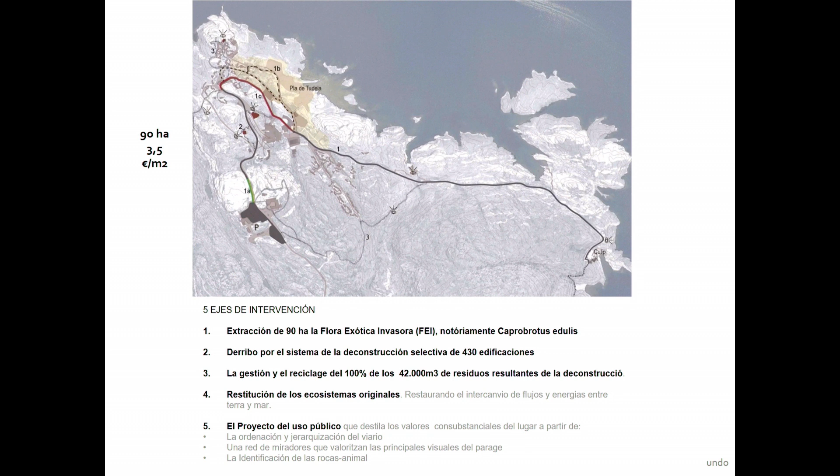The project itself was about deconstructing all these 430 little huts, restaurants, amphitheaters, tennis courts, and everything, to leave some parking space. Although it wasn't in the first mission, we proposed leaving a path so that you could actually visit the site.

Beside that, once you deconstruct something, there are good or bad ways to deal with all the recycled material.

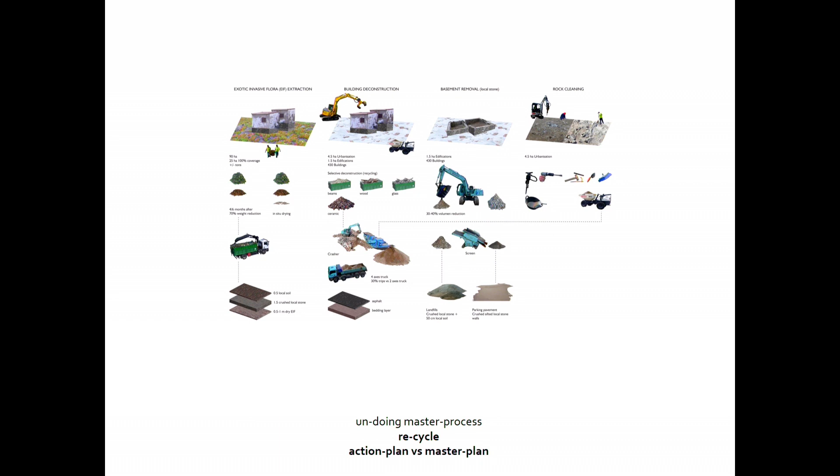So the project had - this is the master plan, and it's a process. It's a process of what we did with the invasive flora that came out of the gardens, the ice plant that was covering the protected rocks.

What we did with the upper part of the buildings, which was built with non-local stone - it was crushed, the wood separated, and the glass and everything recycled. And what we did with the basement, which was built with local stone, and then it followed.

So this project is very much about almost a protocol or procedure to deconstruct and go back to what was there. The project itself was amazing.

It's probably the nicest modern movement or postmodern movement project in Costa Brava, but this was settled all around - well, when this was built, it was the time of dictatorship in Spain. Franco was alive, and then when democracy came, this became a natural park. So it was a spot in the middle of a natural park, and all around was protected.

Then the Club Med model started having problems because it was too austere - rooms with no toilet, and so on - so the whole system was a bit in collapse, and there was a lot of pressure to preserve that space. Finally the state and the Catalan government put money in, and what we did is this.

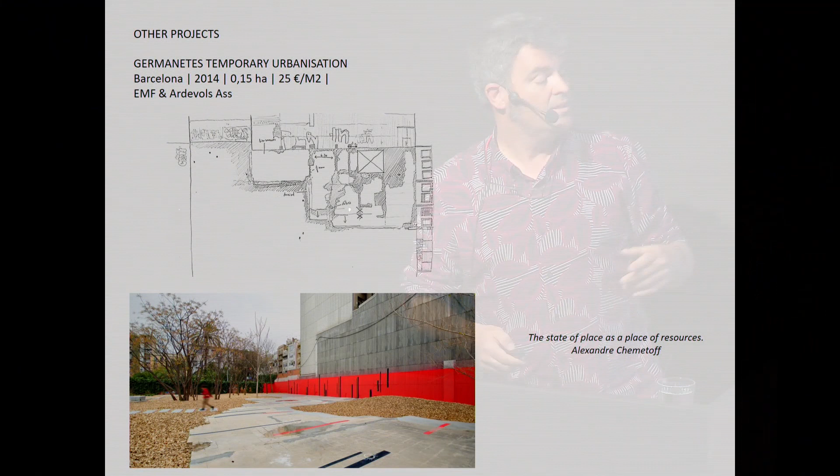This is a completely different project in Barcelona that also has to do with this idea of a bit of deconstruction, and using what is already inside the place. This is a very, very cheap project. It really happened during the top moment of the crisis. And the municipality of Barcelona said, we have these 20 spaces, and took some teams and said, we have no money, just a little money, do something so that temporarily it can be used.

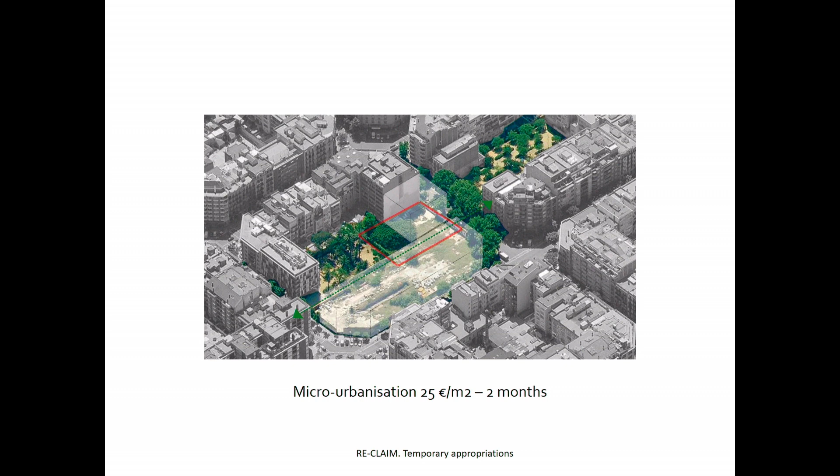So that space was about, that's the surface itself that we're talking about. So when you have no money, what can you do? You really cannot transform the site in depth. What you can do is what judo actually does. You can use the force of the site to make it go farther.

So we did some mapping of the existing quality of the paving and some walls, and then we found out that just beside the site where we were building, the district of Barcelona had a storage place where they had all the pieces they used to build the streetscapes, the curbs and so on. So we did an inventory of it, we named it, we calculated how many they had, and then we used exactly the everyday material of the city of Barcelona, but in a non-conventional way.

So that's kind of a summary where we used those existing windows, we removed the curtains, and then we painted it black. So at the end, when you would be inside and you would see the people walking outside, it would be like they were performing in a theater. Or we used the plastic pieces that separate cars from bicycles. So we played with it all, but in a non-conventional way. These are the granite curbs that are used.

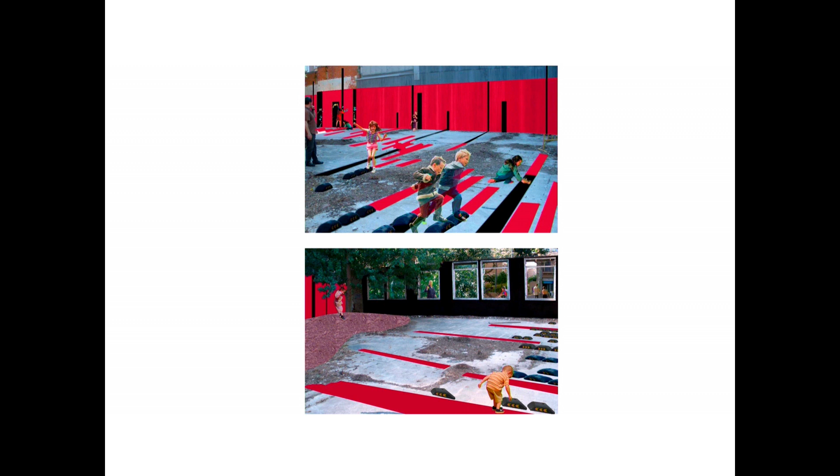So finally, it's a completely different location, but this notion of recycling, and extremely cheap. This cost 25 euros per square meter. And a sidewalk in Barcelona costs 150, so that's already 6 times less than any sidewalk would cost. So we used painting because it was about changing the perception of a place that was initially perceived as unhealthy. We used painting, and it was very, very simple.

And then the district was kind of happy, and we had already worked on that spot here. And then they said, we give you this as well, as a temporary space, but not this. This is the one that will remain, we don't give you this. And that was the parcel next to it. And then we started working on it, and this is the model. So let me show you a bit.

This is the place we had done. This is the place that should be permanent, but they didn't want us to do anything here, and they wanted us to do something here, just temporary. And when we came to the site, we said, this is so stupid, it doesn't make any sense. A high school should be built here. And actually, 1.5 years after we finished the works, they finally started building the high school. So this was really temporary, much more than we expected.

But we did this project a few years after Cap de Creus. Cap de Creus was about materiality, about subtraction, about not adding things, just preserving the emptiness of the rocks and the stone and the wind. And here we are in the very center of Barcelona, I think after Paris one of the most dense cities in Europe.

And then they were asking us, could you please put ping pong? And can you put a basketball court? And can you put a fountain? And can you put children? And we minimalists were suffering so hard having to put so much. And it got to the point where we were completely defeated, and we started saying yes, but then double yes. Yes, you want basket, twice basket.

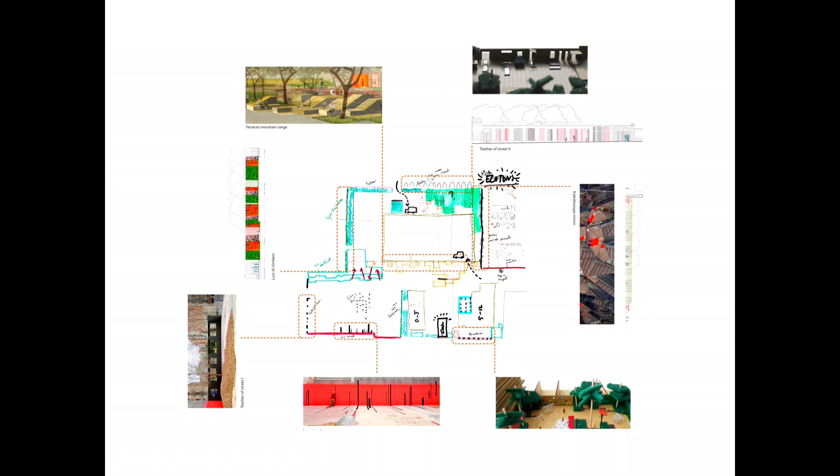So, like you do with the washing machine, we split it up, and then it accelerated the program, and it kind of came to the sides. So this idea that I put in the title, ecotones, productive ecotones, is the idea that every wall could host part of the program, and the center would be a bit more empty, right? So that's some work that we did in practice, fixing things in the wall, trying, for instance, to make a little children's house, and then a picnic table, or whatever we could fix.

And then we kept the wall to the street so that the people inside were completely safe. You could be very relaxed with your kids. They could not run out whatsoever. And that's what we did. And with this idea of the productive frictions, we also kind of advocate for anti-monofunctionalism. So this is a very expressive painting, just the opposite of the other project.

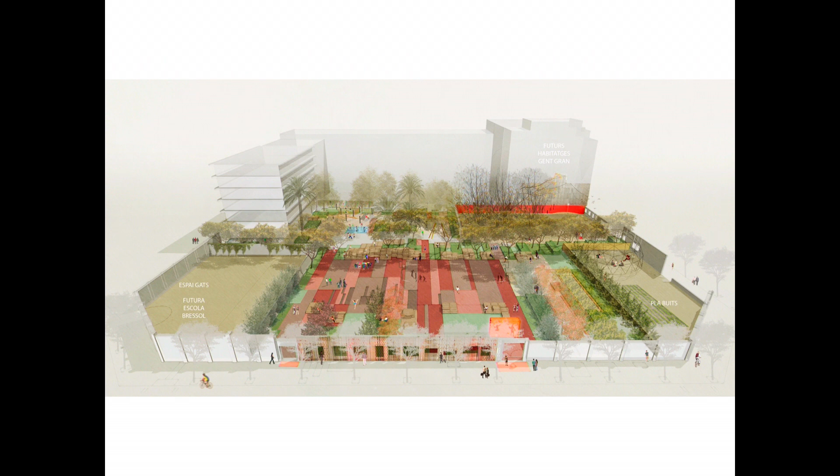But this paving that was painted, in fact, wanted not to be a basketball pitch, wanted not to be a ping pong pitch, wanted to be something that would confuse you. And when you are confused, then you're open to other unexpected things to happen. So actually, it worked incredibly well. I mean, it worked so well that anything that was not hard was completely destroyed. All the plantings, everything, the understory was completely overrun.

So in this place we put these kind of mirrors, so you can dance and see if you look good when you dance, and check your dancing. And they were playing badminton, and then, in the middle of the permanent space and the temporal space, we did a bench, but we also did not want to make a bench. We wanted to make a sort of a topography, let's say. It's a bench, obviously it's a bench. I'll show you later on.

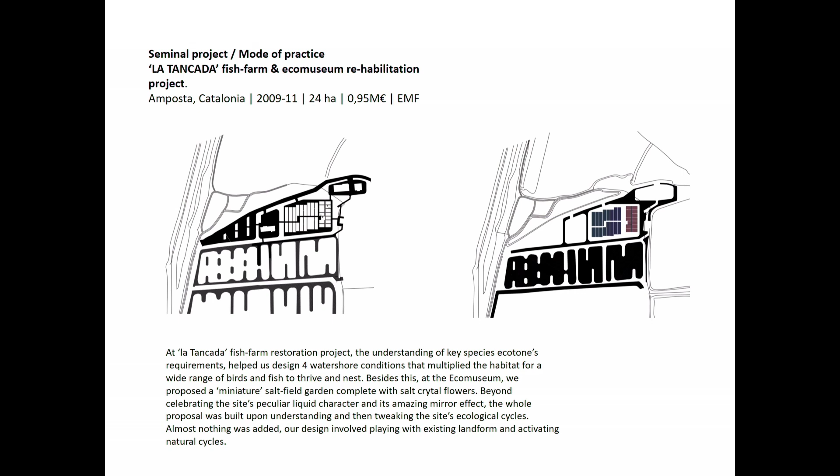And you know, it is said at least that we are in the Anthropocene and we are responsible for the conditions of the Earth, but also for the future of the Earth, if we don't react to it. So this is maybe an optimistic approach, to say that if we learn and perhaps make little mistakes, not too big mistakes, designing with the ecosystems, we may be capable of readdressing certain conditions. So this project is a live project. It's a European-funded project that had 24 hectares.

The first part was to restore habitats, and the second part of the project, which was rather small, was to create an eco-museum for visiting the site and understanding the landscape, right? So the cost, I'm sorry, no, this is not the cost. I'll show you. Well, this is the cost.

So the first thing, again, it was a rather big place with very little money. So first, it was these drawings about trying to understand almost the beauty of the place, but also related to the processes that go with this beauty. Then this is the landscape itself. It's in a delta area. It's a completely flat area. It's all done with sediments, and it's a liquid landscape. It's all done with the water of the Ebro River.

This area here was used to make salt since the 13th century; the Arabs came and they started making salt. And then when the new technology came, rice for eating was produced, and in exactly this canal here, there's the division between the sweet water, where you make the rice, and the salty water, where you could make salt.

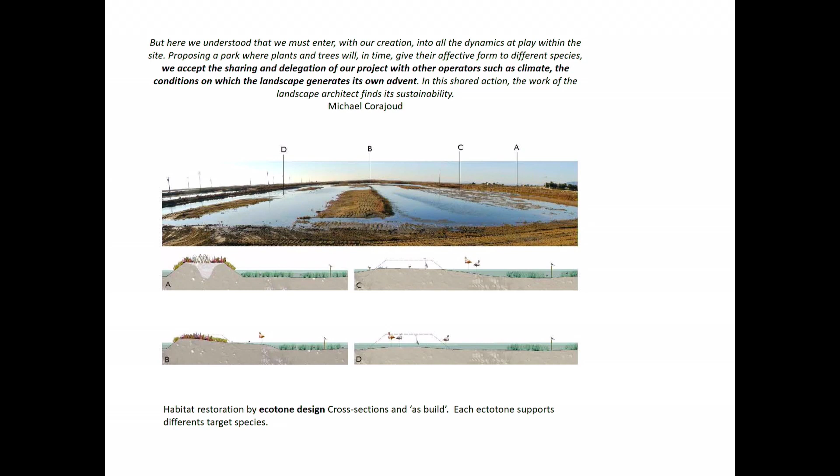These humans were scientists, and they would tell us, to make this fish happy, you need a certain depth of water. But if you want to make the warblers or the flamingos happy, you need another. So the whole project, and this is somewhere in the process, was about 4 cross-sections. And in 4 cross-sections, we defined the mud flats, which were good for birds, deep water, higher earth, which is this area here, which was good for indigenous plants, and then somewhere in between, right? And then, yes, I think I did a very summarized version of that. So with this solution, we built 20 hectares of the project.

And then on the other part, where the tourists had to be received, they asked me if I could make a garden for the museum. It's a place where there's a lot of sun, there are no trees, there's salty water, and a lot of wind. So you could say it's almost impossible to make a traditional garden there, but what's the point of making a traditional garden? So in fact, you have salty water, and our country is rather dry. So we said we're gonna make a party with the water. That's what is really interesting.

So could we make flowers with the salt, the crystallization of salt? These are flowers, in fact. So what we did is that the garden itself is a small scale version of a salt plant. We use exactly the same techniques that they use, but we turn it into a fake. It's a complete fake, a completely artificial garden, where the salt gets to different degrees of concentration to finally become salt. And there's a very beautiful story that goes with it.

When the water gets to a certain salinity, there's a kind of algae that thrives very well. They reproduce a lot. And then there are some microscopic lobsters that love these algae, and they eat them, and they turn red too. And exactly these microcrustaceans are the ones that flamingos eat. So in fact, you can design where you will have the flamingos eating, because you move the water, and when it gets to a certain point, you get the right concentration, and the flamingos go.

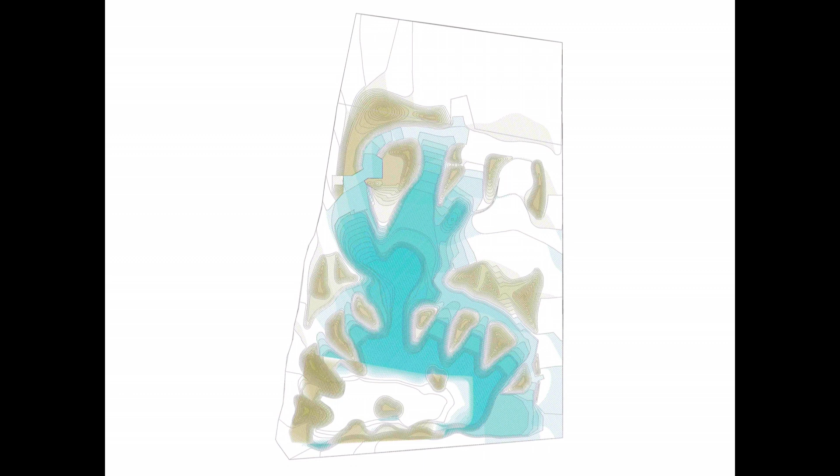This is a bit of the idea of how we would integrate the plantings, and that's the whole map. This is a map about topography, and it's a map about where we excavated and where we did fill in. So roughly you can see the initial shape of the lake here. So everywhere in blue is where we excavated, and everywhere in brown. And this different topography allowed us to create a new beach and to create, for instance, up here, the house on the dune. So it's completely an artificial landscape.

But this completely artificial landscape is done completely following the premises of nature. So at the same time, we were trying to say, when you walk here, to preserve the intimacy, understand the logic of variation of the heights of the water, and actually, next to water, vegetation naturally grows very fast.

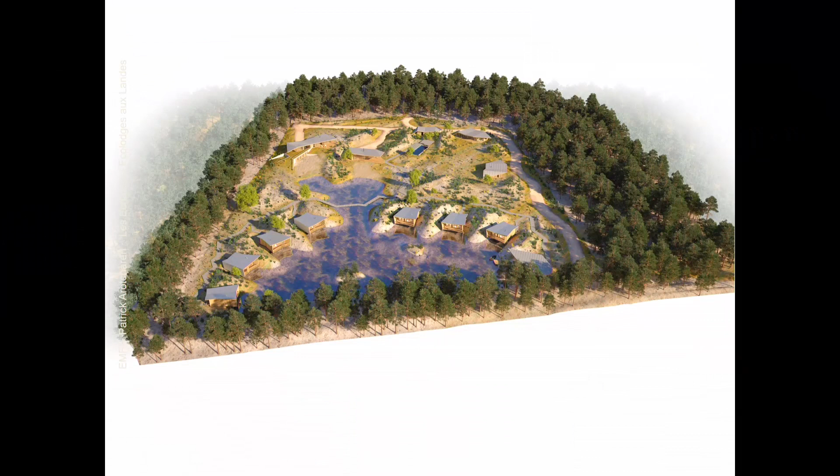So that's a rendering before we started the project of the houses of the lake. There were bigger family houses, a swimming pool, common house, and the house on the dune, the beach. So actually, it was the house on the lake, a house on the beach, and a house on the dune. It was a bit what we prepared, and then we explained to the client that he would have to have some patience, because when you work with sand, it takes time to get rich, and then we did it. We removed the upper part of the earth, put it aside, and we did the topography.

This is not the architect's model. This is my practice. Actually, my practice is half horticulturalists. I am myself a horticulturalist and a landscape architect. They are architects and they are biologists. So within the team, we produce this imagination of how we imagine the sequence of arriving to your own house and to have this intimacy and to be related.

And then this is after construction, I would say 2 years after the construction. This is how you reach by the back. By the back, you get into the housing. This is how nature completely took over. It is a project that cost 27 euros per square meter. The houses cost 2,500, and the landscape 27. So you can calculate, it's almost 100 times less than the housing, right?

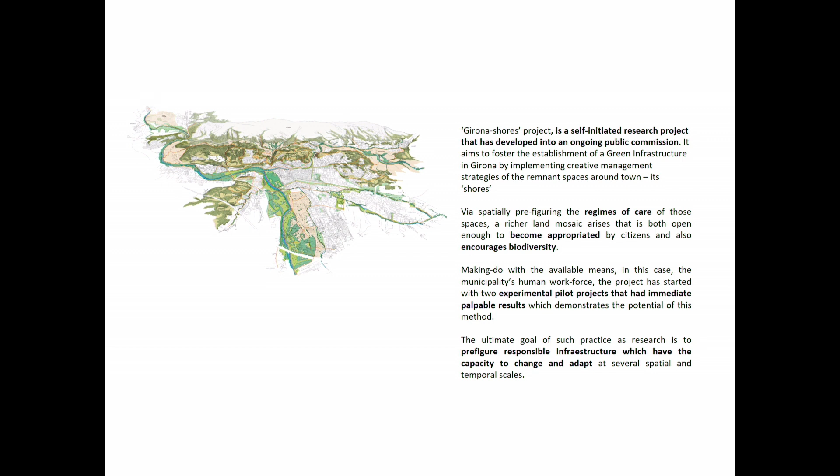This is my hometown, Girona. Girona is a small town. It has 100,000 people. And we are trying to make a kind of a ring of green spaces that would be the biggest facility in town. Actually, the biggest equipment in town. I'm deliberately using what architects use as a facility, like a school. To me, it will be the biggest ever facility for the town.

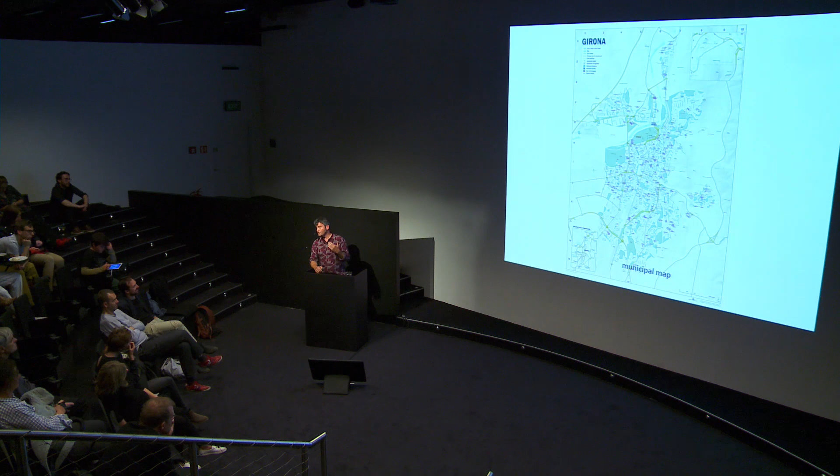So let me show you: if you ever go to Girona and you go to the tourist point, and you say, can you please give me a map? They'll give you a map of this area here. Okay. If you insist and you say, no, I really would like a map of the city, then maybe they give you this part. And if you really, really insist and you say, I won't move until I get the full map, then you get this. So I make a bit of a joke because I just arrived today in Prague and they give you this tiny part of Prague. They don't give you the whole picture, right?

So I'm going to tell you what this map is. This is the official map of the municipality. It says the names of the streets. It points out the urban parks. It relatively shows one of the rivers, and it points in pink the public facilities, say schools, auditoriums, museums, whatever. So let me show you what is not in the map. This is what is not in the map.

This is the forest around the city. This forest, at the moment that I started the project, sorry, this is a park, but this is completely not in the map, right? Or this place was not in the map, or this place was hardly in the map. This place with olive trees, we are quite in the north, so it's quite rare to have olive trees with this beautiful red color. It's not in the map as well.

So actually, I realized that my city thought that the place I love was this. So I removed the color, and all I wanted was in this map. So I thought, is this really my hometown? And actually there are four mountains in the city that are never shown on the map. How could this be neglected, a full mountain that is not in the map? And beside the big river, there are other rivers too. How can it be that in the maps they are hardly acknowledged?

So basically, the utopic moment of this vision is to say that in the 19th and 20th century, all the city extensions we had in Girona were about building new housing and extending the city. Now, it's not me, but it's a general understanding that the city has got to its borders, and it's now maybe time to renew the existing housing and the existing tissues, but not to grow further. So my point is that maybe this time the extension is a green extension. It's not a gray extension, it's a green extension.

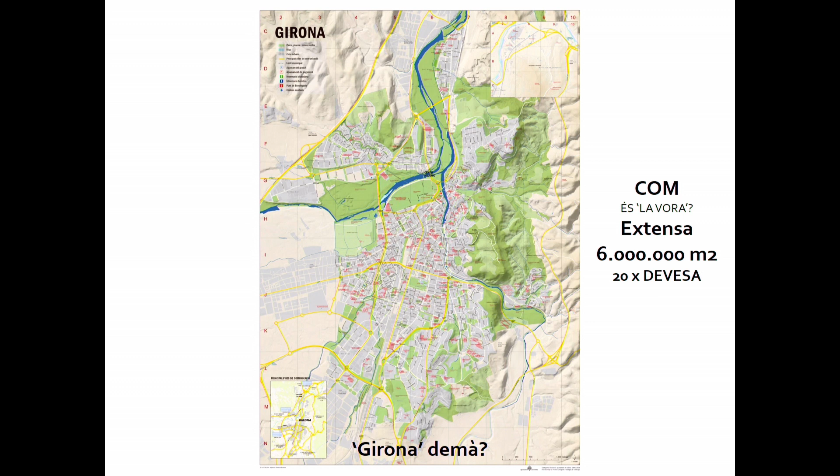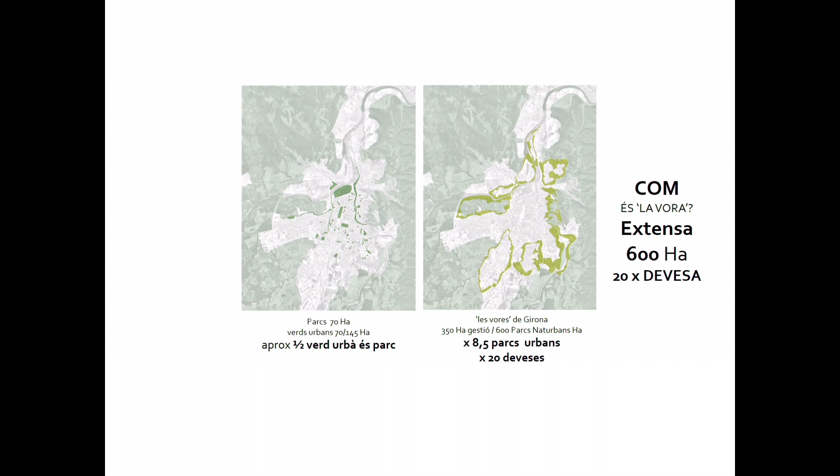And you may know in Barcelona there's this idea of l'Eixample, the grid, l'Eixample, which means to expand. So my political point here is to say that the new expansion is about expanding green. But how can you go from this model, which is the one acknowledged, to this model, which is eight times more surface? That should cost nothing. You cannot pretend you're going to make eight times more surface. So actually the question is not to make a beautiful map and say that you will have 6 million square meters. The challenge here is to think, how can you make it possible? That's, I think, an important point.

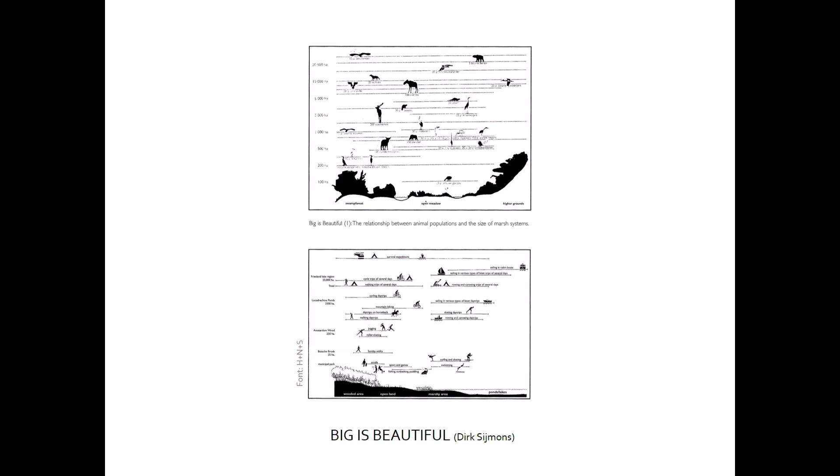And, generally related, we know that in small places and big places in nature, animals perform differently. If you have a small habitat, you can have small animals. But if you get bigger, you can also have bigger animals. And with human beings, it's a bit the same. This is a work by H+N+S, this Dutch practice, and there's a beautiful essay by Dirk Sijmons that I already mentioned before. It's called Big is Beautiful. And it says as well that the more public uses you can have, the bigger it gets.

So what if the important thing would be to make it bigger? Yeah, big is important too. The kind of city we have in Girona and in most European cities is a city where the green spaces are done with archipelagos and they are not really connected, so they deliver a kind of limited facility.

There's a general understanding all over the world and Europe that we should focus more on green infrastructures. Linking the word infrastructure to green means they should have continuity, and that you should put value on everyday nature, the proximity places, not only remote natural places or beautiful historical parks in the center, but the challenge to see these huge areas all around town.

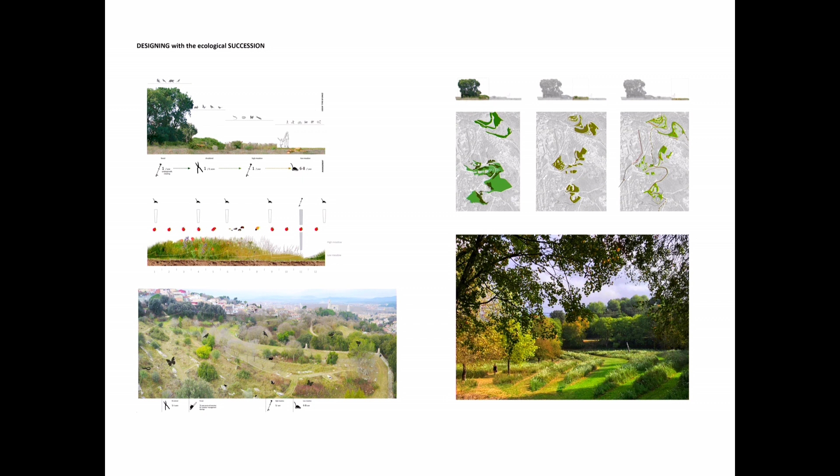This was based on a very ecological and common sense principle: these are regimes of care, regimes of cutting. If you cut very often, 6, 8, 12, 25 times per year, you get a low place where people can walk and some animals may use it. If you cut once or twice a year, you get a high prairie. If you cut once every 5 years, you get shrubs and so on. This is called ecological succession, and everybody knows it.

It also depends on the time of year when you cut. If we cut with the mower to get the grass too early, the ladybirds would not be happy and would not reproduce. But if you wait until they make the babies, then cut later on, ladybirds are happy - ladybirds, butterflies, and so on.

So this is a parody of a serious ecological approach. It's a bit hard for you to see, but this is where we cut, where people can walk, and this is where we don't cut. So there's really a spatial design - it's ecological design, but with a spatial design.

And these are the percentages: 50% of the place we do nothing, we let it grow to forest. 25% of the place we let it be high prairie, so we work less than before. And basically 25% we work more intensively than before. This contrast makes a whole difference.

And it happens in this place here. So there's 20% of the place that before was not accessible, now it's accessible. It makes a complete kind of public space that in Barcelona they started calling 'Naturban,' so between the two.

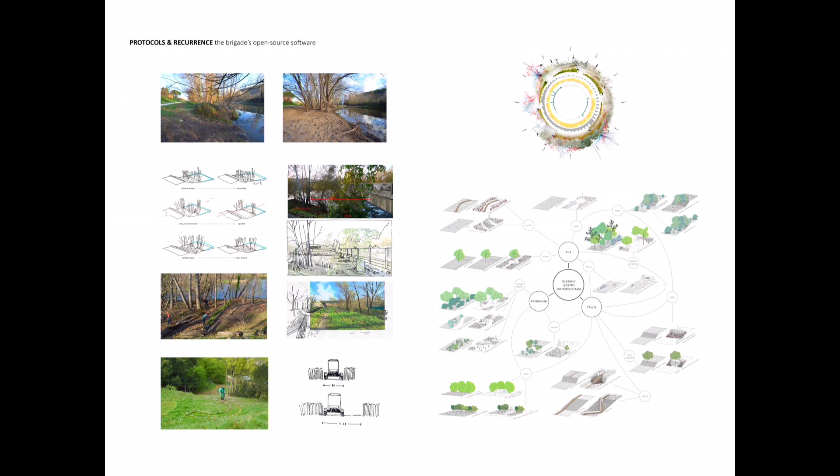So what started like 2 pilot projects turned into a protocol - flat areas, heritage areas, and slopey areas. This protocol has some easy to follow instructions, and the people from the brigade, I'd say 70% of the cases, respond completely without a designer. So who did this? It was the staff of the brigade, the technical service, but also the staff. Then it was us, in fact, together with the technical part of these people.

We also engaged the local neighbors into a series of workshops. We organized walks in every neighborhood where we intervene, for them to explain what they thought was the more interesting parts, but also for us to invite them to know what we were proposing. And finally, some schools need their students to complete training periods, so they come to work for free.

So it's about using all those energies, and this is probably the non-obvious solution that we found, and one we're kind of happy with. This is a place showing how it was before, completely overgrown.

The first step that costs no money happened in the pilot projects: there's been a transmission of knowledge, creation of knowledge together with the public services of maintenance. So this first step, they do it themselves. And the place has changed, and now citizens can already come.

We worked quite hard to make it in a way that planners from the city understand, but also citizens. So this is a typical poster of one of the mountains that is not very well known. This is the technical plan of the architects, which defines actions, and those actions are organized from difficult and expensive to easy and cheap. So there should not be many excuses to get started.

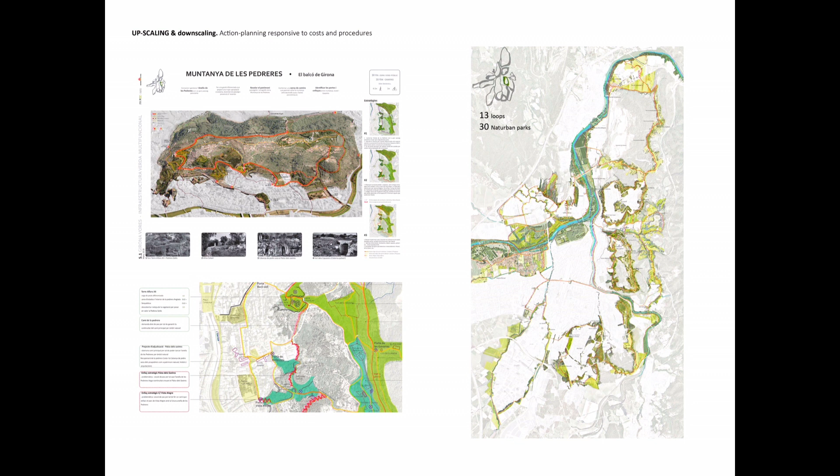And then for each of the 13, we found kind of 13 areas. We also asked the citizens, if you had to choose a postcard from your natural area, what would be your postcard? So we tried to find ways not only to really change the place, but as we talked before, to change the perception of citizens about the place. So these are 13 geographical entities that make sense.

So that's the planning we were talking about before, the technical planning with the nasty moments, the difficult ones, the ones that really need planning movements, and that will take a long time to do. This is the legend with all these degrees of difficulty, and this is €1, €2, €3. So it's a kind of correlation between the investment and the result.

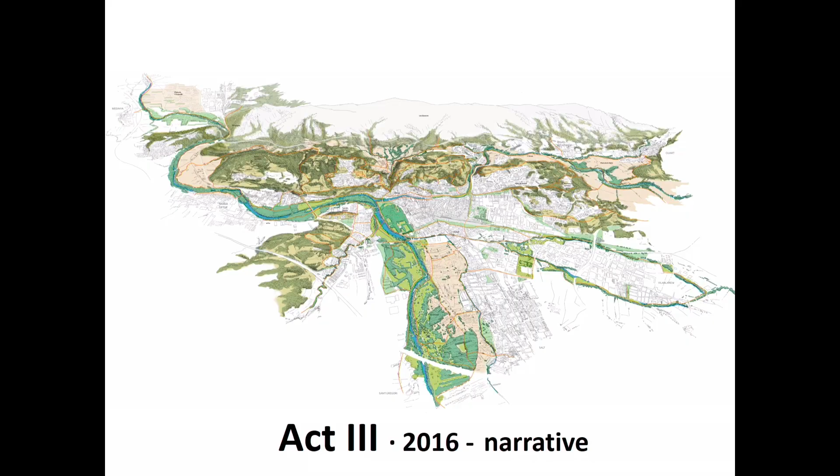Then how we tried to reach the press, and there's all this Rambla, the famous street, green Rambla next to the river. That's where we placed this kind of chair. And then we got little things, like this is a new postcard. It's really a new postcard, and it's taken from one of our viewpoints.

And is Decathlon popular here? The sports shop? Okay, so Quechua. It's a new tribe, an urban tribe, a weekend tribe. People dress up in Quechua and go to the land. So we are very proud that Quechua chose one of our recovered landscapes to make an advert. So when you go into Decathlon in Girona, they're using one of the places that we have recovered. So the final thing is not trying to get money, because finally we don't get money, we don't get a real commission.

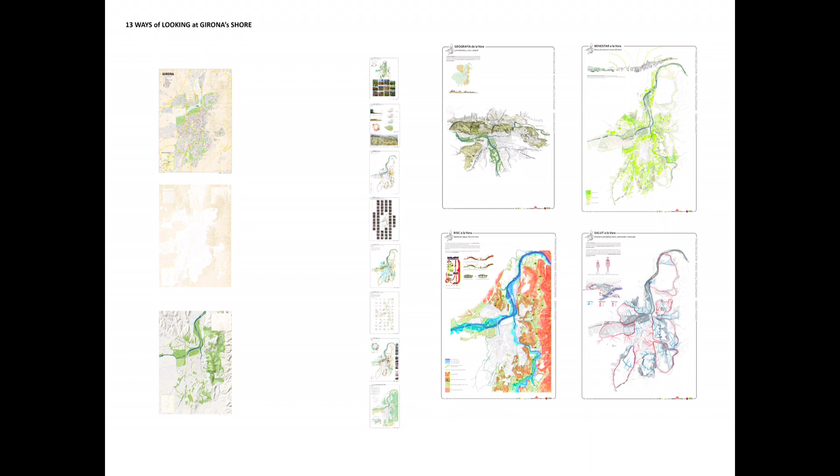We said, what if we try to look in 13 different ways at the same place? The first, I already told you, was the no place. Then, I don't remember how many I have, well, let's say we did 13. One, the most conventional one, is the ecosystems. That's the map that almost every city has. But we also went and bothered to take photos, and I'm sure almost 98% of people in Girona don't know all these photos. So they don't know about the diversity and richness of the landscapes in their own hometown, right?

This one shows the neighborhoods and the distance: 2 minutes, 5 minutes, 10 minutes. So it's also a way to say, okay, this is the very center. This is where most of the money goes. But if you live here, you won't go walking there every day. So it's a very democratic and distributive way to invest money all around this area. This is the other way around: 1 minute, 5 minutes, 10 minutes from the green area. So you can see the people who are more distant from those natural spaces.

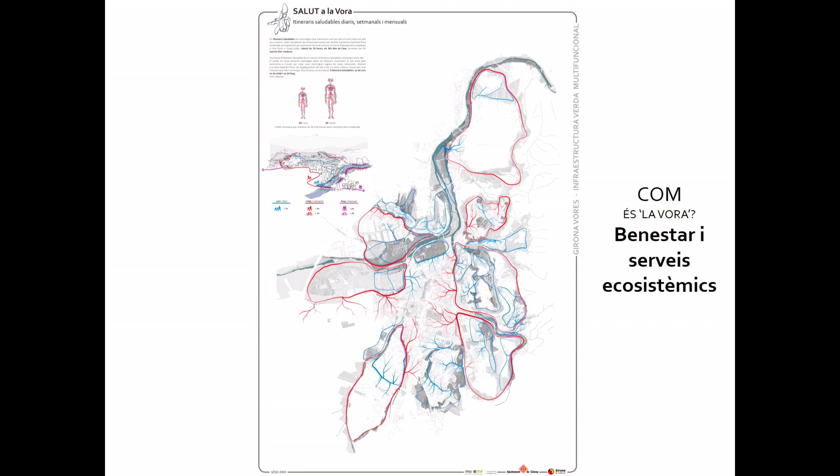This is my favorite one. This is about health. The WHO says that adults should walk at least 30 minutes every day, kids 1 hour, right? What we did here, these are the 13 loops, and they are organized in distances of an everyday walk, weekly walk, monthly walk. It is a way as well to say, this is not only about saving birds, it's about health, it's about quality of life, it's about tourism.

These are about, for instance, heritage. And what we did is, you know, the Michelin Guide says 3 stars means you should organize a trip and go. 2 stars, if you are on a trip, you take the detour and go. And 1 star is, if you are next to it, stop, please, okay?

So we invented a system of valuing all these areas that were not in the map. And we did it with two different systems: landscape, and more architectural or historical. Then we put together all the postcards that we chose together with the neighborhoods, with the neighbors. So we get 50 new icons for the city.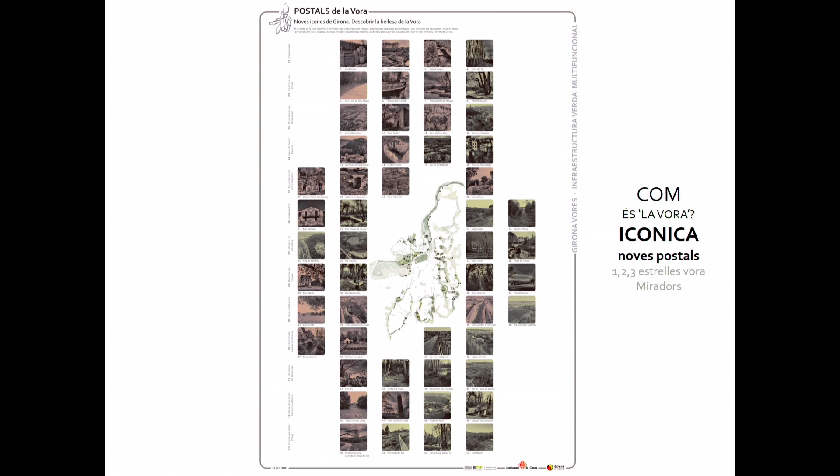So all this is about changing a place, but also building a new understanding of a place. Now we don't know if we will get... I think I want to explain this one. This is about desperation, because we still don't get money, even though we try very hard, from the municipality. We get very little money. We tried with Europe, all right? But I don't know the response.

I think I'll skip this part, and I'll go to the very end. I tried to present families of projects more related to ecology, maybe to planning, about this idea of a capacity to adapt, right? To take decisions gradually, to have the capacity to improve the project step by step. But to me, at the end, all our projects start and finish with a walk. And that means for me the experiential dimension of design and the scale of design, or your body in the landscape.

And I use this word, choreography. It's by Lawrence Halprin, the North American landscape architect. His wife was a choreographer. And inspired by his wife, he started talking about this idea of designing the path system exactly as if it were a choreography where you would move through the landscape.

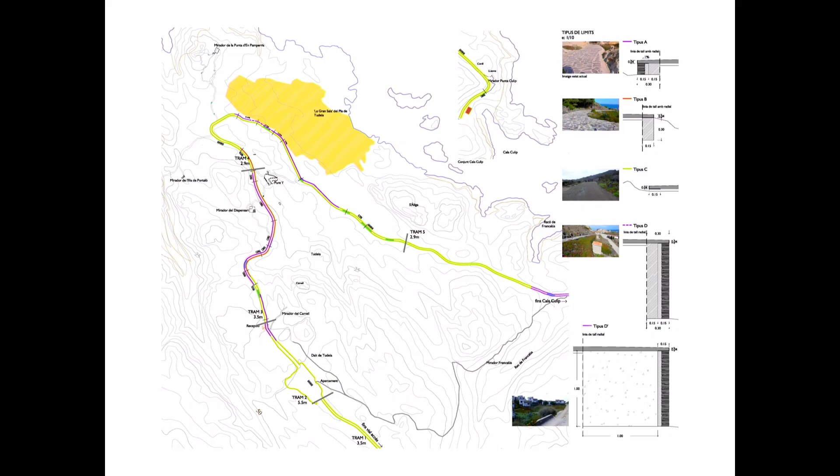And this map tells how we would work on top of an existing path. So the entrance path, we narrow it down, so we cut it. But then because we cut it, we also had to kind of confine it in order to make it. And then we use the stone from the basement of the housing and the local tradition of making dry walls.

This is precisely beside the beach, that because we wanted to save the sediments, we had to trace a new path, and that was newly built. And one of the biggest pleasures I have in life is just to see the path, to decide exactly. First we try to do it, we walk on site, then we try to do it in AutoCAD or in practice. But then when it comes to the day of building, that you are on site and you put the things, it's amazing.

So we actually did not have money to spend on expensive materials. So what we had to do was to have a very enduring material. We spent 7 million on this project, but ever since, that was 2010, nobody ever went for maintenance. And we know because the natural parks are very poor at home. So we had to make a cheap, but also very endurable material. But we did not surrender to have this kind of finition. And the technical people who work with that invented this kind of zip that help us.

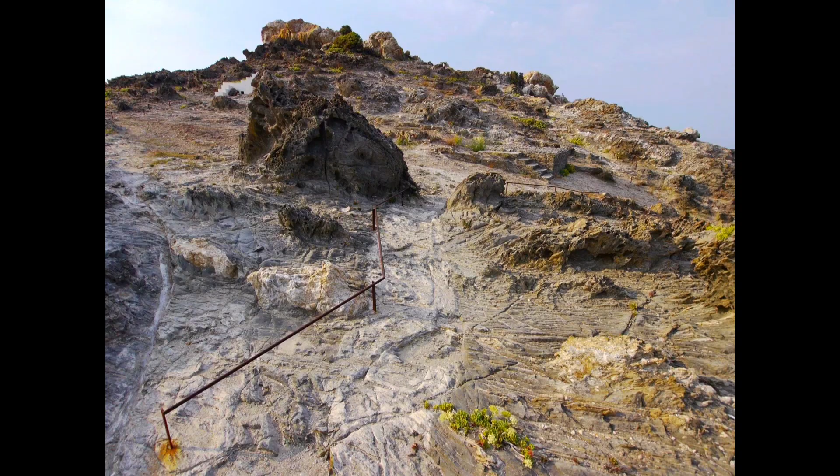This is a completely non-architectural approach, as you probably have noticed. Because when you come here, it's like, wow, this is beautiful. But what is beautiful is obviously not the fence. What is beautiful is to arrive in that high moment and get this landscape opening to you. But there were a number of other places like this. Can you see this little crack? So the path, you maybe see the whitish area here. So the path was here.

So by removing this, first you don't have to do so much maintenance. It's very easy to maintain. There is a certain cost, but you don't do it all the time. So it's also cheap. The less you put, the less you have to maintain as well. So it kind of makes sense, and it kind of works. I mean, most people want to follow it, and there are people who do not want to follow it and actually don't.

And then it came to this moment and these rocks. Can you see them? Maybe some of you can already see animals, maybe some of you don't, but this is what the kids do, and the fishermen did.

We picked nine, we drew the silhouette, and then we built these kind of lecterns, I think they are called in English. So this is a Corten steel silhouette; there's nothing written. It's up to you to play or not. And they are done very low. They are not calling attention. They are oriented to the rock. So if you want, you can play or not.